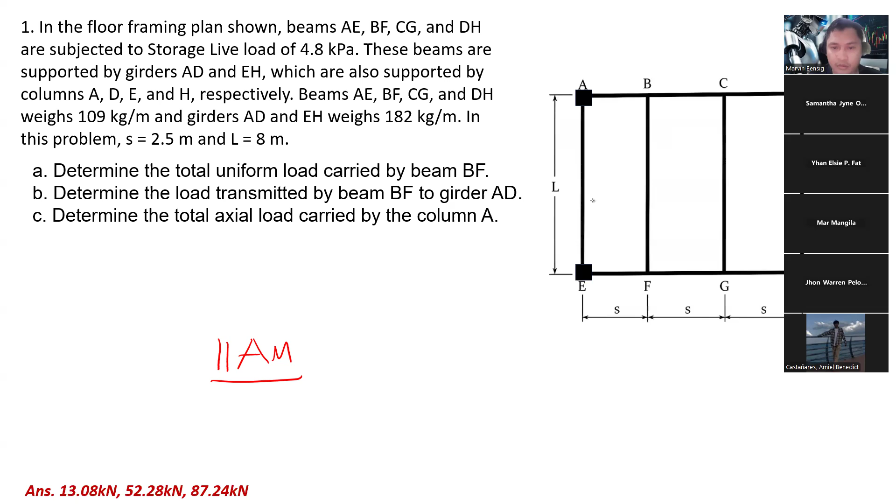This topic is focusing on one-way slab. This is applicable to the quiz and is included in the midterm. So quiz number 2 will be next week and the midterm will be next week.

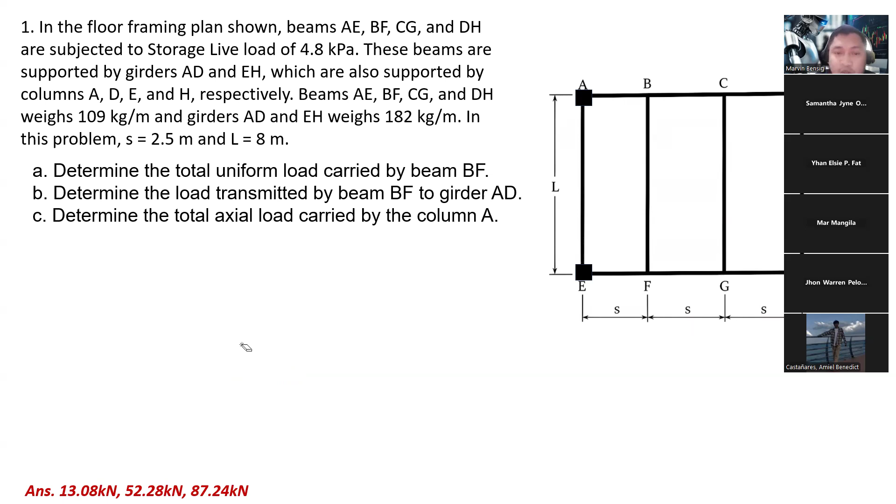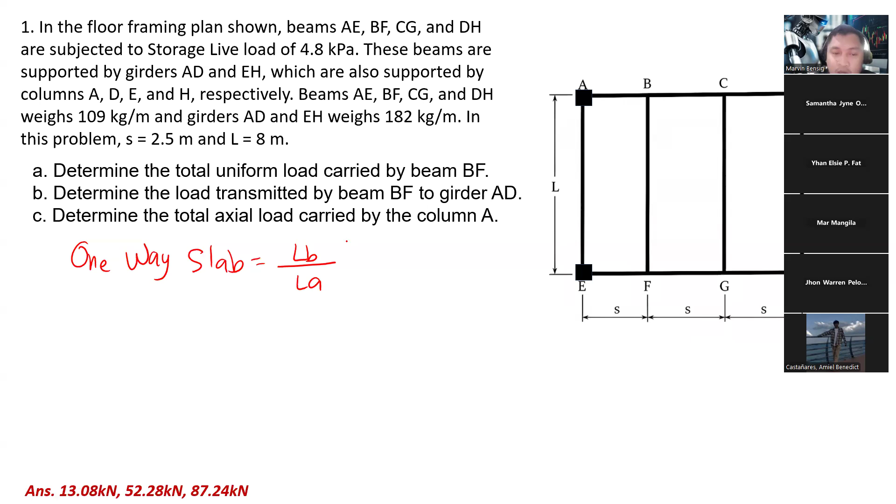One-way slab is based on the ratio between the long span and the shorter span. Long span meaning the length, for example this slab. If this is LA and this is LB, so LB is the longer span. And take note, LA and LB are clear spans, meaning unsupported.

For example, 10 divided by 2, that gives you the ratio, the modular ratio. If this is greater than 2, that's a one-way slab, approaching rectangular. But if your ratio is less than 2, it's not one-way, so it becomes two-way slab, if the ratio of the longer span and the shorter span is less than 2.

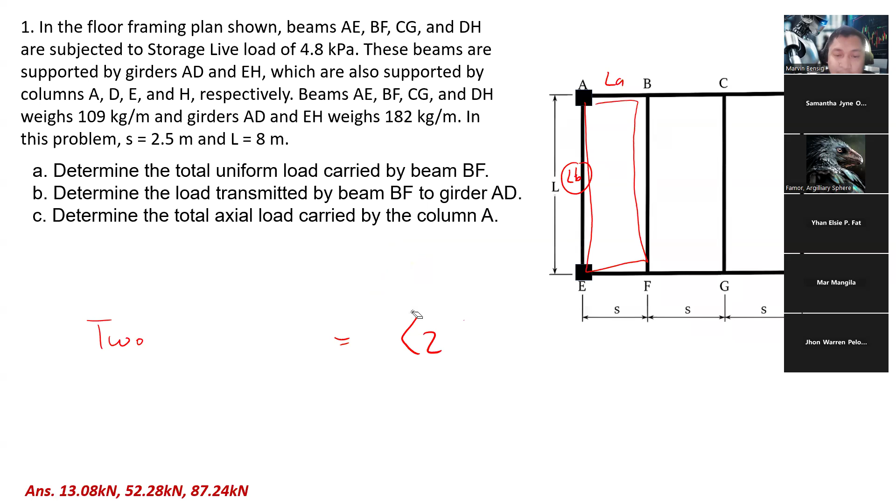Then we will solve two problems today, and again this focuses on one-way slab. After this, an additional requirement is to make an Excel sheet, a design spreadsheet for one-way slab.

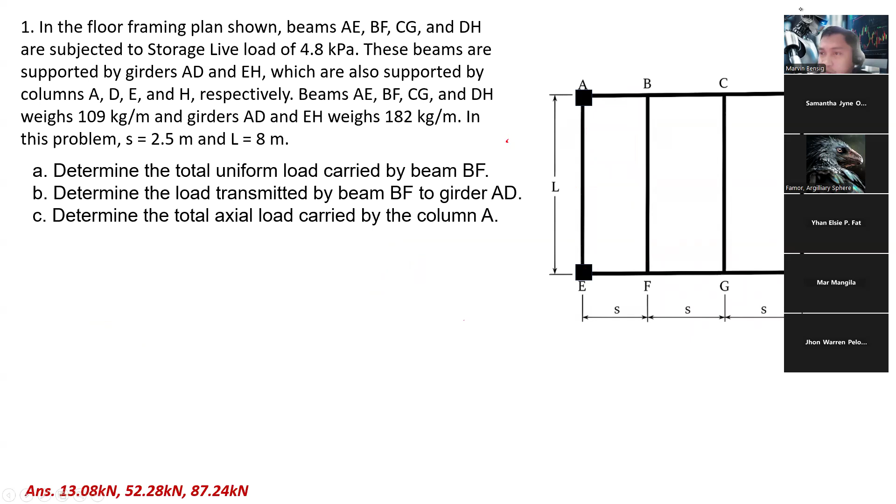So let's solve this. Here's the given, just read along. In the floor framing plan shown, here's the framing plan. For beams AE, this is A, E for this beam, BF, CG, and DH are subjected to storage live load. So given, I'll write the live load of 4.8 kilopascal.

So when you say beams, these are connected to another beam, or connected to a girder, that's called beams. When we say girders, these are beams connected to a column. That's called girder, connected to columns. But if the beam is directly connected to another beam, that's called beams. At least we can differentiate the two.

Okay, these beams are supported by girders AD and EH. So here's AD and EH. Which are also supported by columns A, D, E, and H.

Beams AE, BF, CG, and DH weigh 109 kilogram per meter. This is given in the problem, the weight, their self-weight, self-weight of the beam. And girders AD and EH are also given, in terms of kilogram per meter, meaning the self-weight is given. So let's put here, self-weight of the beams is 109.

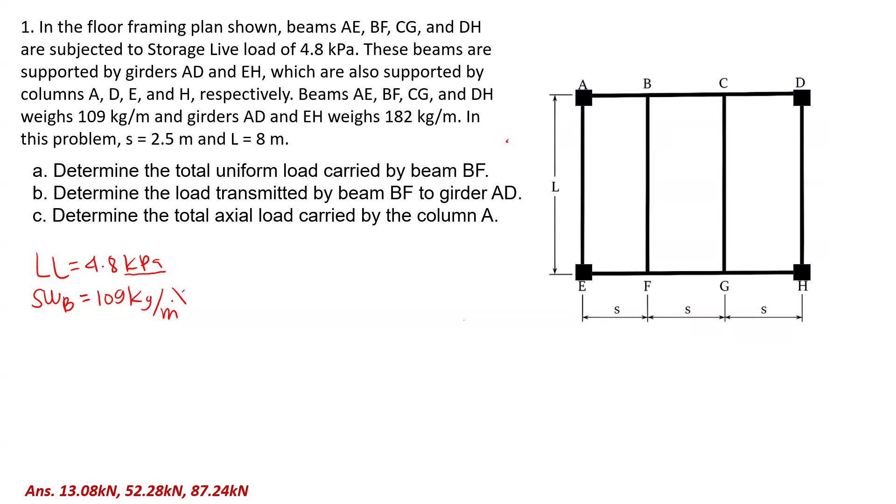So let's write the given: self-weight of the beam is 109 kilogram per meter. To be consistent with units, since it's in kilopascal, I will convert this into kilonewton. So how to convert this? Just multiply it by 9.81, right? That gives you Newton. Then we need to divide this by 1,000 to make it kilonewton. So this is in kilonewton per meter now.

Okay, then for the girder, same process. Self-weight of the girder given in the problem is 182. Same, multiply with 9.81, divide by 1,000, and it will give you kilonewton per meter. So this is a distributed load.

Okay, then given the tributary, in this problem S, meaning this is the S, the tributary spacing is 2.5 and the span L is 8 meters.

Okay, now question number 1, letter A: determine the total uniform load carried by the beam BF. So beam BF is which one? That one, and which is also the same as CG. Beam BF, CG.

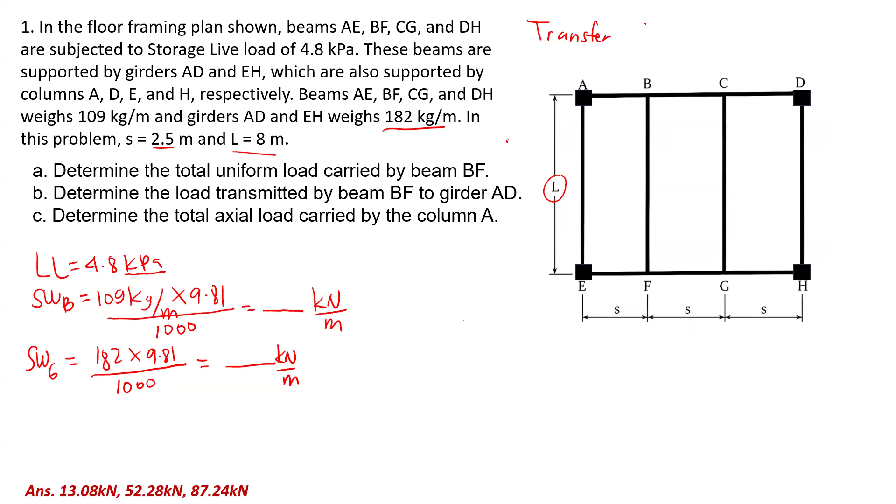This problem is all about transferring loads, load transfer, transferring loads from slab to beam, and beam to columns, transferring loads.

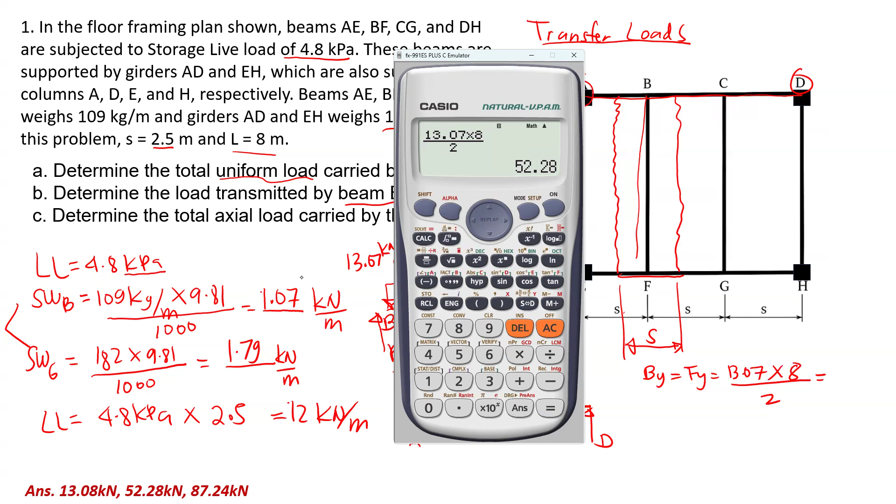52.28 kilonewton. So that's for this one. From beam BF, this is transferred to the girder AD. And it's the same for girder EH, they're equal.

Next is determine the total axial load carried by column A. If we look at column A, it has two load transfers. The first is from girder AD. Girder AD's reaction is transferred to the column, and that is RAD.

So that's the total acting load. We need to divide this by 2 since there are two supports, and with this we'll get reaction AD. So we have 2 times 52.28 plus 1.79 times 7.5, divided by 2. This gives reaction of 58.99.

Let's double check: 2 times 52.28 plus 1.79, the value I stored earlier at point B, times 7.5, divided by 2. Is that correct? So this gives 58.99.

Then for reaction AE, it's the same setup but the tributary is only half of S. So for reaction AE, let me write this down.

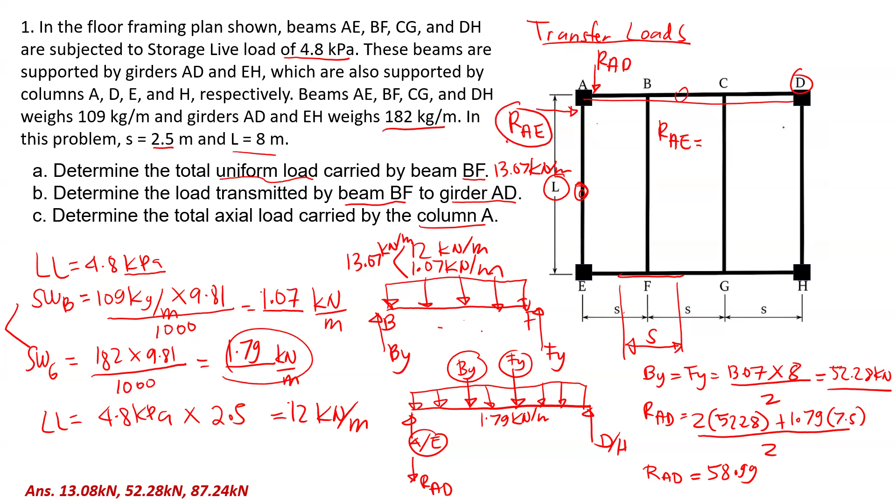Self-weight, again 1.07, times the length L which is 8. So the total acting load is self-weight plus 4.8 live load, multiplied by the tributary. The tributary is half of 2.5, so half of 2.5 is 1.25. Multiply this with the total span of 8, then divide by 2 to get this reaction.

So reaction AE, let's compute: 1.07 times 8 plus 4.8 times 1.25 times 8, divided by 2. So that is 28.28. Let's double check with 4.8 and 1.25, that should be correct.

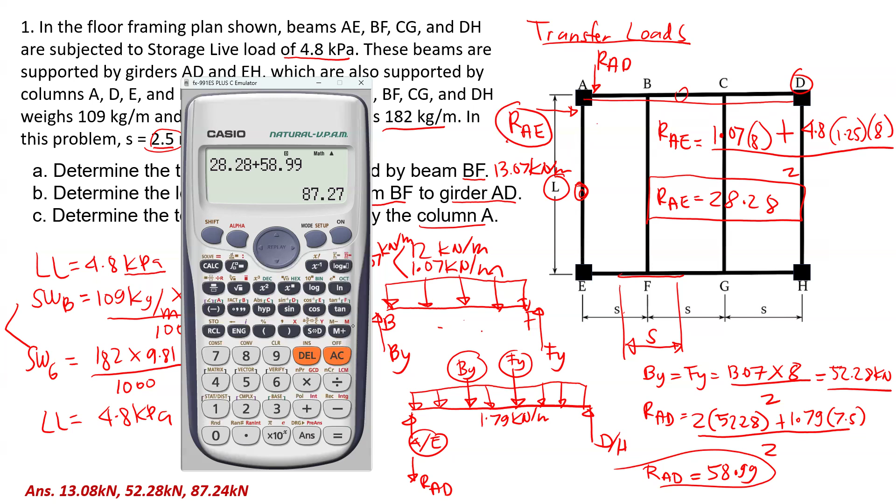Then we add these, since the total axial load carried by the column should be the sum of RAE and RAD. So we add: 28.28 plus RAD of 58.99. So it should be 87.27. There's a slight discrepancy in the value, probably due to rounding of numbers.

If you have any questions, just comment. So that's it, that completes the quiz. Let's proceed to number 2.

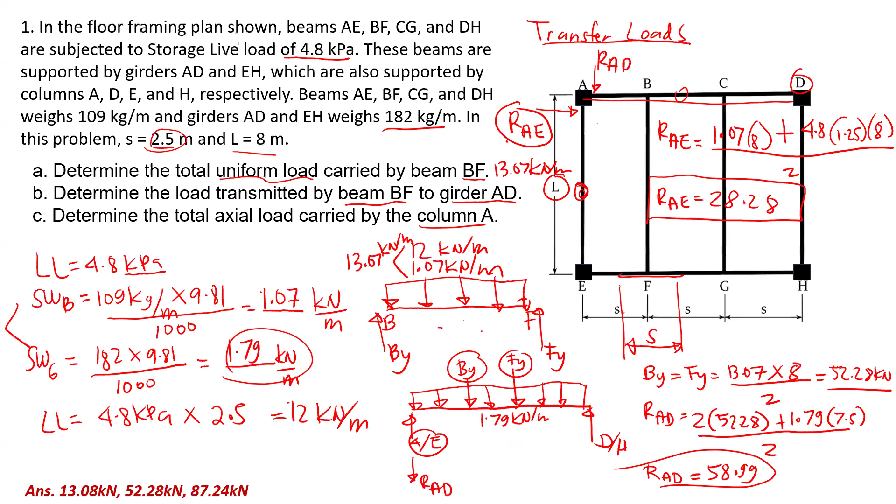Number 2 is more on designing a one-way slab, and this type of problem appears in the board exam. Given the floor slab framing in the figure, the slab is subjected to a total factored load of 12 kilopascal, or kilonewton per square meter.

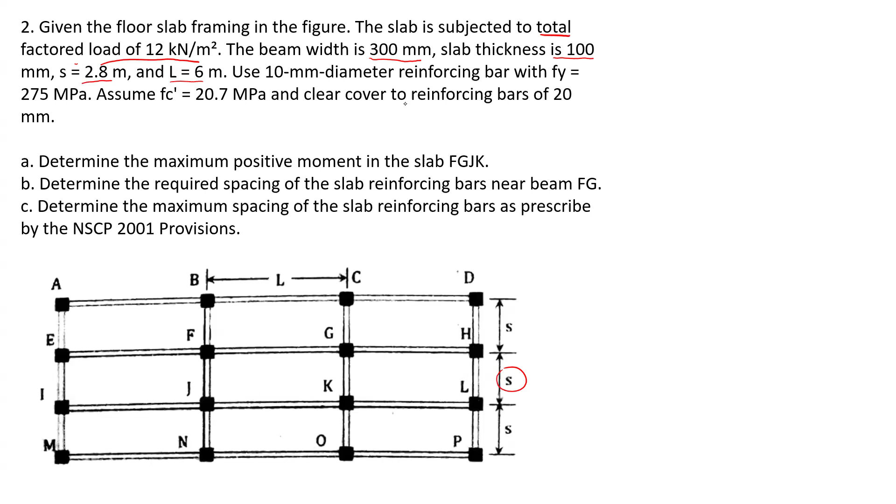And class, this part can be a bit tricky - the clear cover to reinforcing bar of 20 mm. Now when you say clear cover, if we look at this section of the slab with the rebar, this is the reinforcement. When you say clear cover, it should be this one, right?